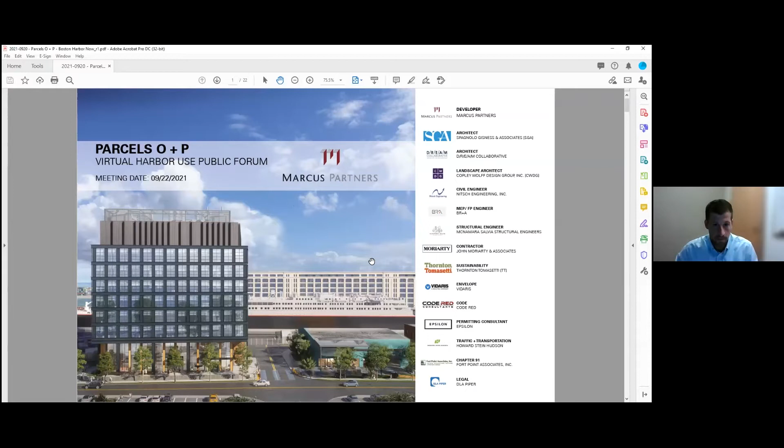Thank you, Bud, and good morning, everyone. Kristen, if you could just pull the presentation up as we get started. My name is Andrew Mack, and I'm with Marcus Partners, as Bud mentioned. For those who are not familiar with our firm, we're a real estate and development firm based here in Boston. We're the developers of Parcels O and P. I'm joined here by several of my colleagues: Patrick Souza, Mike Scannell, Mary Kensinger.

As a firm, we're very active in the Raymond L. Flynn Marine Park, which outside of this development, we are also the developers of 310 Northern Avenue, sometimes referred to as Parcel X. So we had submitted an LOI for that in July of this year. We also recently submitted on 22 Dry Dock, which is just around the corner. We are one of three firms pursuing that project with the city, and that is a development we are very excited about.

Our presentation, I'd encourage you to look at the proposal that was submitted. So for today, though, for Parcels O and P, a quick introduction of our team. The structure of our presentation today is going to be 20 or 30 minutes. It's a smaller group here on this forum, so we would encourage questions, have it become conversational. This is here for you to get information about our project, and we'd be happy to answer any questions.

So our design is led by a joint venture between SGA and Dream Collaborative. Kristen O'Gorman is here from SGA; Kristen will be presenting our design. Kristen's also joined by Troy DePisa from Dream Collaborative. We gave Troy the day off, so Troy won't be speaking, and he's on for the first 30 minutes if there's any questions for Troy.

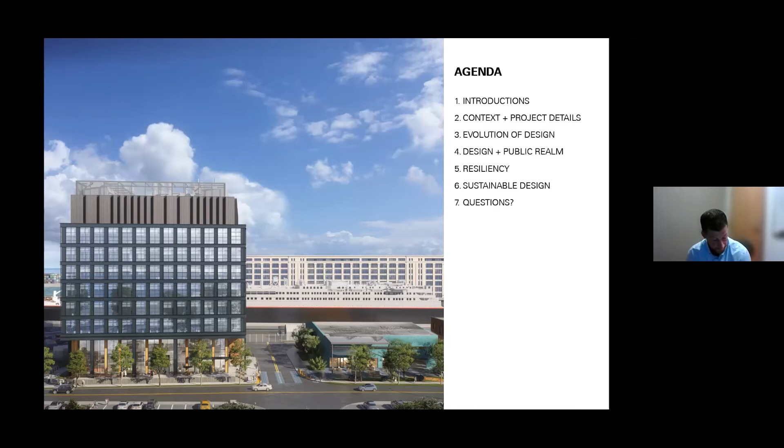A few high-level overview points. The presentation was set up looking at that survey at the beginning, and for some folks this is the first time you've heard about our project, so we'll try to give you an all-encompassing overview. For those who have followed us through our submissions and public meetings, this will also be an update. We've tried to have both audiences in mind.

As Bud noted, in August we received our Article 80 approval. This was the culmination of submissions — we submitted our letter of intent in December of 2020, filed our PNF in April, and from April continuing through today it's been a very busy summer with a lot of public meetings and great feedback. As we opened the meeting discussing some initiatives of Boston Harbor Now related to access and resiliency, those are two areas we think the development responded to well, and in addition sustainability — three areas where we feel we are a leader.

The project at a high level will be a 219,000 square foot research and development, or life science, facility on parcel O to the right. The parcel to the left, parcel P, will be an adaptive reuse of the existing facility as an amenity building — Kristen will talk about that. We think that's a really special building, and we're excited about not just that building, but the public realm created in front of it.

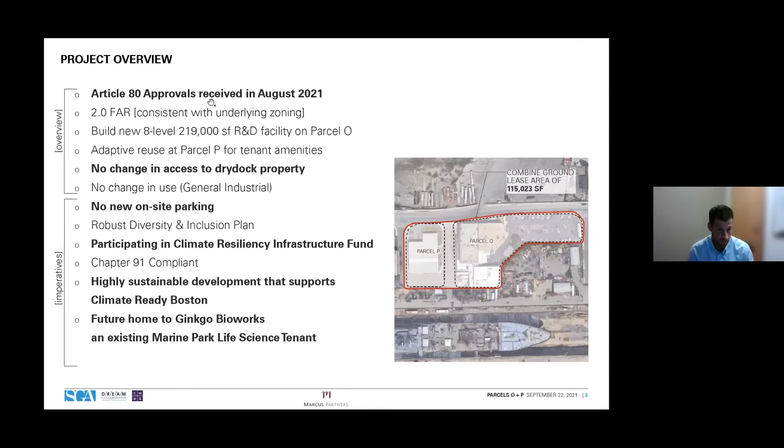And with that, I think we should dig in on our design, and I'll turn it over to Kristen to talk through that. Great, thanks.

Kristen O'Gorman with SGA. Thanks for having us this morning. Just quickly to orient everybody on where we are in the world, we're in the Marine Industrial Park. We have two parcels, O and P. It's this panhandle shaped site here adjacent to the dry dock.

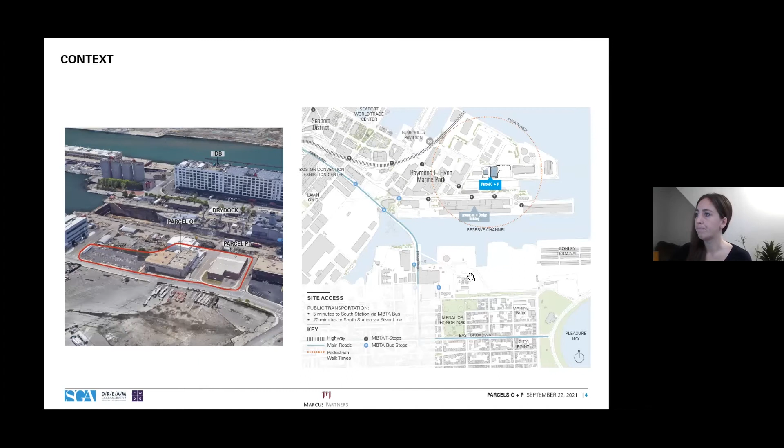For those new to this project, we thought it'd be helpful to run through how we ended up where we are today in terms of our building. As Andrew noted, we have two existing buildings on our site, the Au Bon Pain building, and 3 Anchor Way, which is the McDonald's steel building.

Preserving the working waterfront and access to the dry dock was one of the largest design drivers here, which really located our building for us. We made sure that we maintained that access both on Anchor Way and Au Bon Pain Way.

We're going to be demoing the Au Bon Pain building and virtually constructing in the footprint that it is today. We'll be preserving the Parcel P building as an amenity building to support the larger tenant. We're looking at 8 levels of R&D plus mechanicals, and all of this will be kept under the FAA height limits from Logan airspace.

Moving on to the articulation of the building, we are raising our first floor 4 feet above average grade, in response to sea level rise. We are also raising critical infrastructure an additional foot above that, so this building will stay online during a storm event.

What that's allowed us to do is articulate our entryway, and we've created what we're calling a porch. This is a new typology that will be found in the city where other projects will also have to raise their first floor above the average grade of the road infrastructure, so there are different ways to resolve that. We used this as an opportunity to create a celebrated dock expression and porch for our building, which we'll get into on future slides.

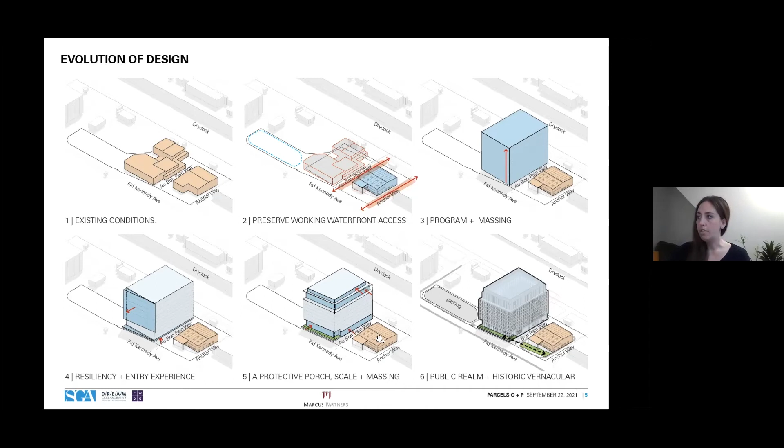The way we were able to reduce carbon emissions and nearly eliminate fossil fuels is by the investment of air source heat pumps. We also worked with the city on some articulation of the penthouse, materiality, as I noted, and the public realm. We are going to be in compliance with Boston's Complete Streets at our sidewalks, so our sidewalk widths have increased, and we have tree and planting strips along the edge of our property as well. We're adding solar panels to Parcel O's south-facing penthouse and to Parcel P.

Parcel P will also be 100% electric VRF and will be in compliance with LEED Gold standards as well. Even though that's not new construction, we're doing as much as we can to tell a similar sustainability story there. Christine will go into the design of the plaza more - we're really excited about that too.

Another note is that we've just implemented a lot of art here. I'm working with the city, and they seem quite excited about that. We're hoping to wrap the Parcel P building in some form of art, use it as a canvas, and link that to some of our back of house loading dock doors, and also looking to use pavement art to connect the parcels together.

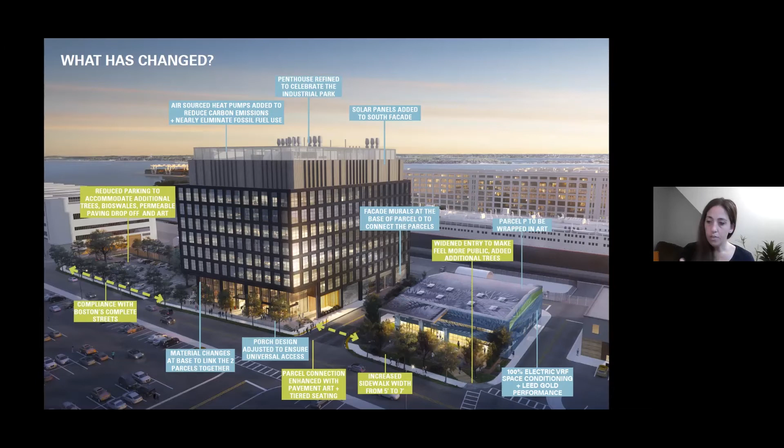We've thought of this project as 3 components: we have Parcel P, we have Parcel O, and then we have the parking area. We're able to carry art and some of our streetscapes through the project to make it feel cohesive.

Just to orient you all again in plan, Parcel P is this amenity building where the indoor bike parking will be located. The plaza is out front. We have showers and lockers in the main Parcel O building. We also wanted to highlight that on top of the indoor bike parking, we have convenience racks located throughout the site.

We've also worked in a ride share and drop off, to pull cars off of Fid Kennedy into our site. And we do have 25% of our lot designated for electric vehicles.

I just wanted to note too, I think Andrew touched on it, but this relationship between pedestrians and trucks was kind of a design driver as well through this process. It's that separation - protecting the trucks from the people and the people from the trucks. There are different ways that we've looked at doing that.

The design of our plaza pulls people in, and the elevated porch actually pulls people up and away from the street. Little things like the rideshare drop-off pull cars off of Fid Kennedy, which is a trucking route that we need to preserve. Our loading, electrical, and some of our other back of house are located more adjacent to the loading dock here, and we will load off of Au Bon Pain Way.

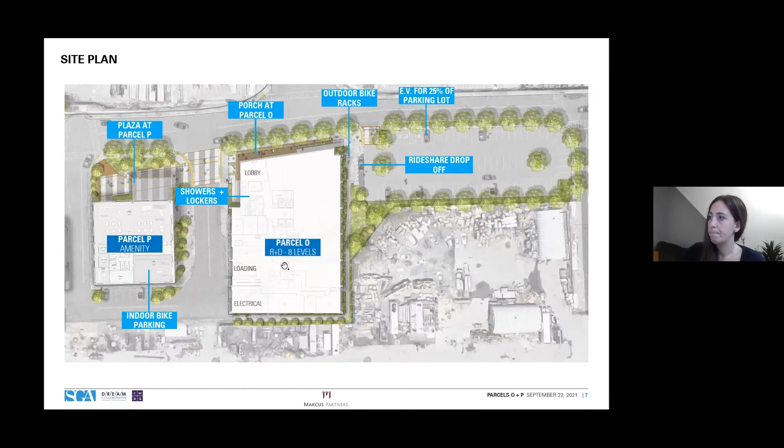Jumping into a little bit of inspiration for the architecture, we really looked to the neighborhood. We were very much inspired by the rigor found at the IDB, this historic typology, and then also some of the steel shapes and materiality found throughout the park or the area, such as in Conley Terminal.

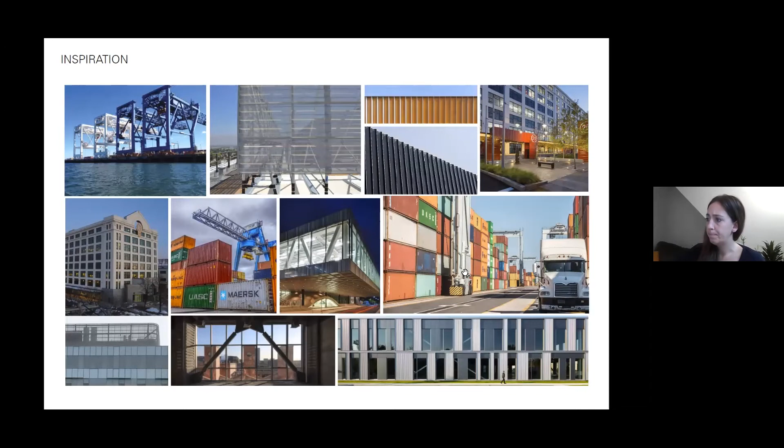Sustainability doesn't just mean the resiliency measures and some of the mechanics we're putting in the building, but the actual design was thoughtful with that as well. We wanted to maximize our daylighting and views, but also minimize our vision glass. So we've strategically located our glass to respond to being most appreciated on the interior of the building.

So we've looked at the program that will be in here, which is a life science company, and then we've worked back from there. And then as noted, looking towards the inspiration of the IDB, we've kind of layered on this rigor and rhythm, but utilizing steel shapes that were maybe more found in Conley Terminal.

Our total building average of vision glass is actually 33%, which we're quite proud of. We've also looked at orientation as well, so our south side is more opaque and our north side is more vision glass to respond to that.

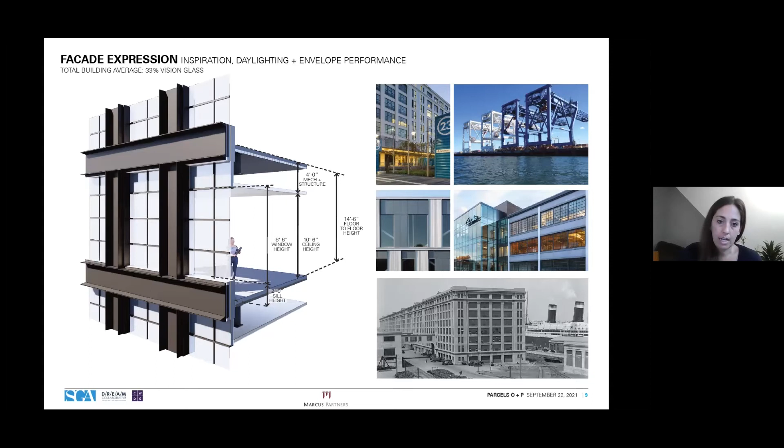Dropping you down to the ground here, you're looking towards our entry base and this dock expression that we've described, once again inspired by the IDB and that loading dock expression there. Using this elevation change as an opportunity for step planters and bleachers and to really celebrate this entry.

We're also looking to use warmer materials down at the base. We're looking to be inspired by blackened steel above, but maybe more of a wood look at the base to warm it up, have it be a more tactile material where people will be next to it experiencing it.

You're also starting to see a hint of a suggestion of that pavement art that will cross over Au Bon Pain Way and connect back towards the plaza at Parcel P. Looking down Au Bon Pain Way, you're catching the side of our loading docks, which we're suggesting some sort of mural to mimic what we would be implementing at the Parcel P building.

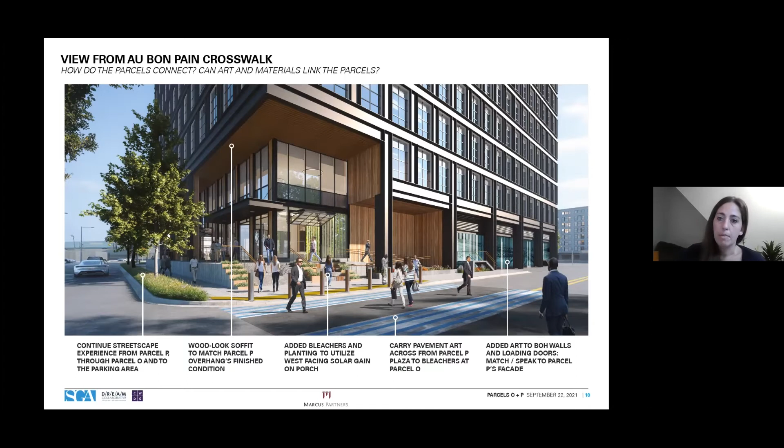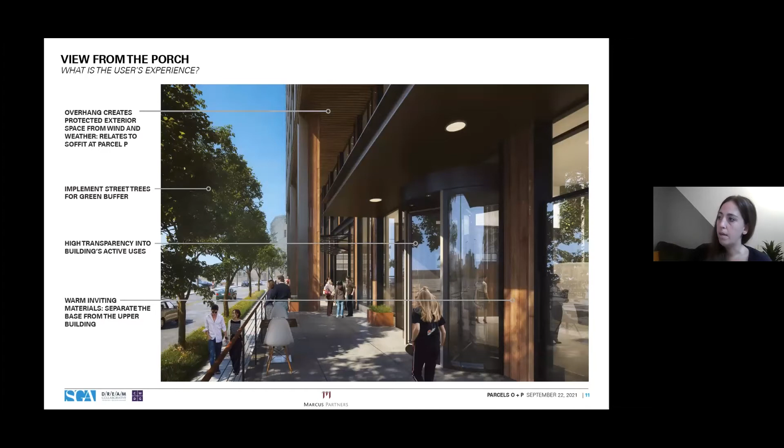Just bringing you up on that porch so you can start to experience that, once again lifting people up and away from that trucking route. And then looking back towards the Parcel P building.

And the art that you're seeing here is a placeholder. We're going to be working with the city to nail that down, but the story that we've been working with them is that this art wants to represent the neighborhood, the marine park, but also the tenant, which is a biology company. So that's why you're seeing a hint of coral and starfish, because that's the play between biology and marine, which we think has a nice synergy.

Even though these buildings are different, we're looking to link them with some materiality. There's an existing addition on the front of Parcel P that we are removing but keeping the structure of. We'll be looking to add that kind of warm wood look on the soffit there to mimic the soffit overhang that's found at Parcel O, and once again implementing some blackened steel there too.

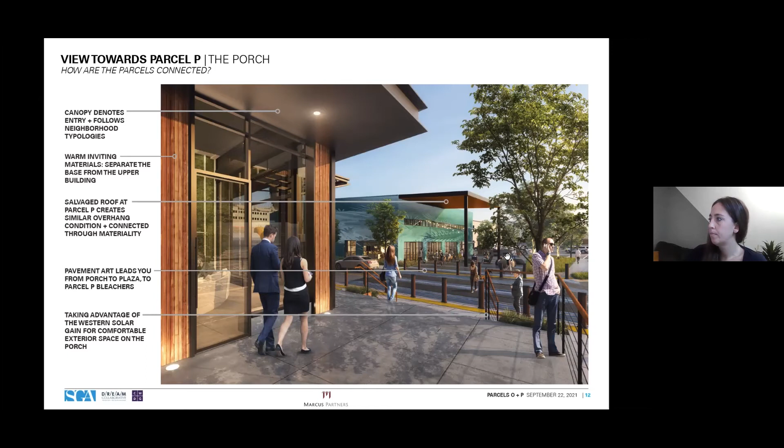So Christine Wilson, the landscape architect with Copley Wolff Design Group. Good morning, everyone. I want to first kind of dig into the pedestrian experience.

Kristen already mentioned this, but we are implementing the principles of complete streets along the entire frontage of this project. So to bring your attention to the sections on the right, the top one is cut through the streetscape at Parcel P, and the bottom one is cut through the Parcel O with the front porch. So we are widening the sidewalk and pulling it away from the roadway curb to introduce a tree line planting strip to help buffer pedestrians from the trucks and the trucks from the pedestrians.

Also, as far as the pedestrian experience, if you're coming via bus or from the Innovation Design Building or elsewhere in the Seaport, you will be walking towards this project along Fid Kennedy, coming from the west. So looking at this diagram, that's the bottom right. You first approach parcel P, and there we have the parcel P Plaza.

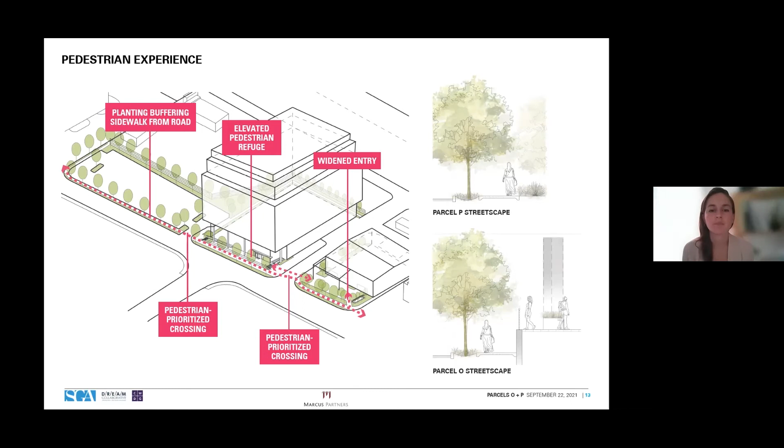So you can push and pull this furniture around, push it away for social distancing, for example, or move it all into one area if you have an event.

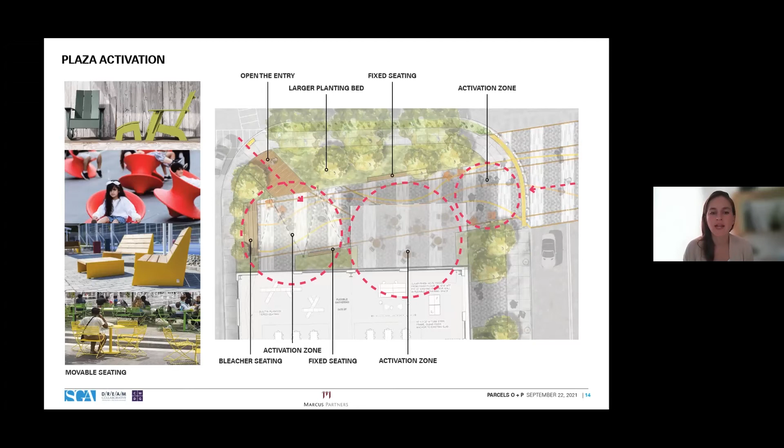If we move on to the next slide, we see this space more at eye level, with the planting on the left that maintains sight lines, but also makes the space feel buffered from the working waterfront traffic. Kristen already touched on the material connections between these two buildings, the wood soffit, the facade murals.

The design of the facade murals will be coordinated with the pavement mural that is in this plaza space, and again continues across, up on Penn Way streetscape, to that porch.

So here we're standing right in front of the bleachers on the parcel P side, looking over at the bleachers on parcel O.

I'll add a comment on this, because we had something in the chat from Tom Reddy, Fort Point Neighborhood Association, on whether the amenity building was private or public. Tom, just want to address: the amenity building use has not changed, that remains a private amenity, and it is leased by Ginkgo Bioworks.

What we have, and Christine and the team have worked really hard on, is making sure the public knows that this is a public plaza. So how we program it is going to be really important to encourage activation there. But I just wanted to acknowledge your question and respond. Sorry, Christine.

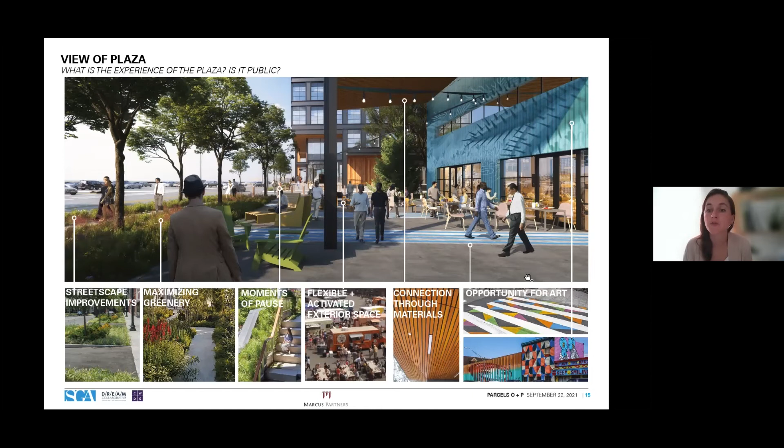So if we continue on to the next slide, I'm going to hand it off to Chris, and then I'll take back the mic to talk a little more about the planting design.

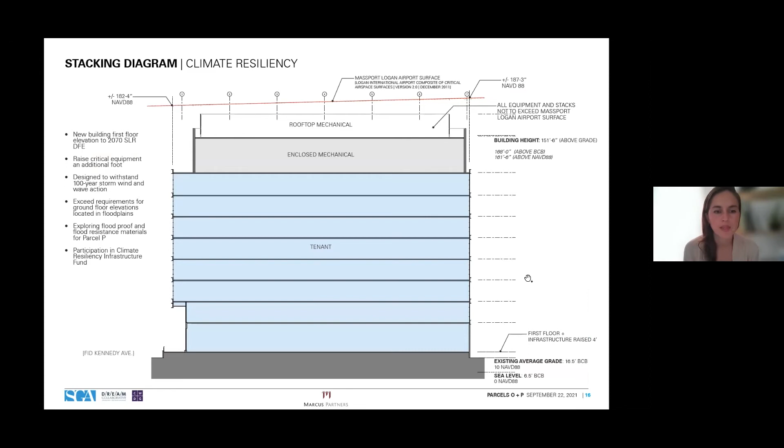Thanks, Christine. Chris Adi, Nitsch Engineering. And so getting into the resiliency discussion here a little bit for climate change.

We've touched on some of this already. This is giving a vertical orientation to the building and how we're reacting to sea level rise and climate change. If you look at the bottom right, you can see current sea level at 6.5 Boston City Base, and the average site grade is about 16.5.

So we're about 10 feet above that today, which coincidentally is also the 100-year floodplain today. To meet these resiliency requirements, we're raising the first floor and infrastructure 4 feet above that, which if you look at the left side, you can see how the front porch is elevated above Fid Kennedy Avenue. This is in compliance with the current 2070 sea level rise design flood elevation.

And then the Climate Resiliency Fund, realizing that we're doing what we can to protect our site, but that this is really a district-wide, neighborhood-wide issue, participating in this fund helps look at that on a larger scale.

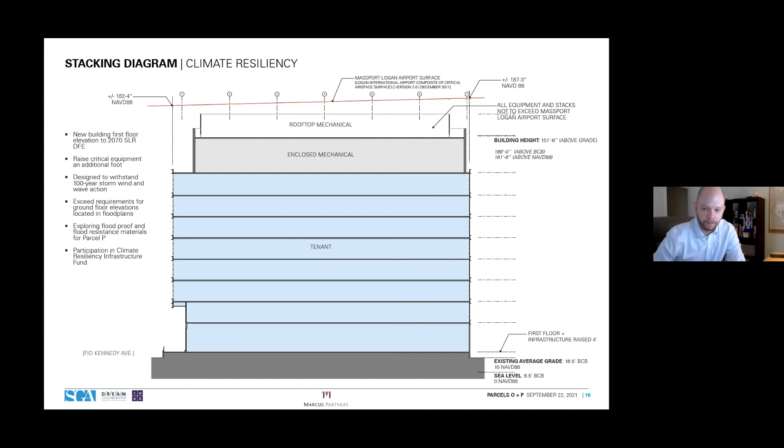And I think kind of unique for an urban site like this, we're going to have some bioretention areas, which will direct stormwater to and give some surface treatment. It's something you don't see as much in the city because there just isn't space for it, but we have some space here. So we're working with Copley Wolff on that design.

We're going to capture and infiltrate the first 1.25 inches of stormwater runoff over the site impervious areas. This is in compliance with city standards. The benefit here is that this site overflows through existing storm drainage infrastructure pretty much directly to Boston Harbor, just across the street. So capturing that first 1.25 inches will allow us to treat that water before it goes out to the harbor and improve the stormwater quality leaving the site.

Additionally, we'll have additional plantings throughout the site, in the parking lot, and around the parking lot and buildings, which will help with heat island effect.

We're also looking at a reduction in peak runoff rates and volume during not just the 1% storm, but all the storms we're looking at—the 2, 10, 25, and 100-year storms. A reduction in the rate and volume of runoff leaving the site in those situations will allow the city storm system to better handle runoff from larger storms in the future. And with that, I'll turn it back over to Christine.

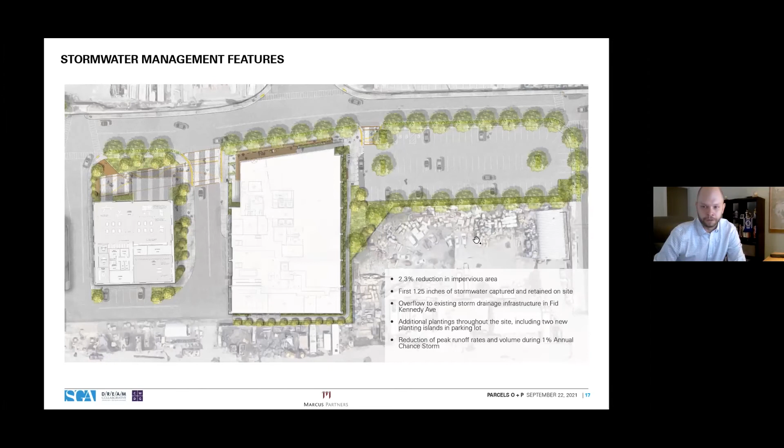To the south, we're draining the parking lot into these bioretention areas to utilize the soil and plant material to help filtrate the particles out of the stormwater.

As far as the planting, we're not only using plants that are native to Massachusetts, but specifically to Suffolk County. We're also looking at salt-tolerant species, not only because this area will flood, but also due to road salt from de-icing these roads and the working waterfront during winter, and of course the salt spray in the air given the proximity to the ocean.

We're also really analyzing where we need to locate really hardy plants, like along the roadways and areas where there will be people, versus the more protected bioretention areas where those species are specific for bioretention. So we're coordinating the planting design with the grading and drainage that Chris mentioned.

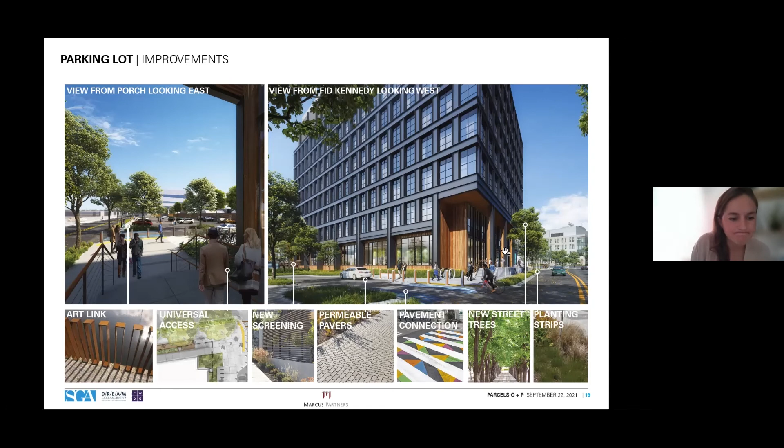Thanks, Christine. Christine, Chris, and Kristen have done a great job going through and summarizing a lot of this stuff, but I'm just going to provide an overview and talk about some of the things that we, as sustainability consultants, think really stand out about this project and are, quite frankly, a tremendous public benefit.

Starting with this image, we'll go from outside to inside. Christine mentioned all the landscaping measures put in here. One of the most important things we wanted was for people to be able to arrive at the site in a sustainable manner, so there's ample bike parking and plenty of throughways for bicycles to safely travel amongst cars in the working waterfront.

Once folks get to the site, like Christine mentioned, there's incredible landscaping, native and salt-tolerant species. As Chris mentioned, we're accommodating sea level rise, so water is dealt with on site with beautiful landscaping treatments.

Continuing into the building itself, Kristen and team have done a really strategic job with the shell of the building. You can see the window-to-wall ratio is pretty modest on this project. It's nice, it matches the architecture around it, but from a sustainability perspective, it reduces heat losses associated with the envelope. We consider that one of our first measures towards reducing the carbon footprint of any project—trying to reduce the loads the building sees in the first place.

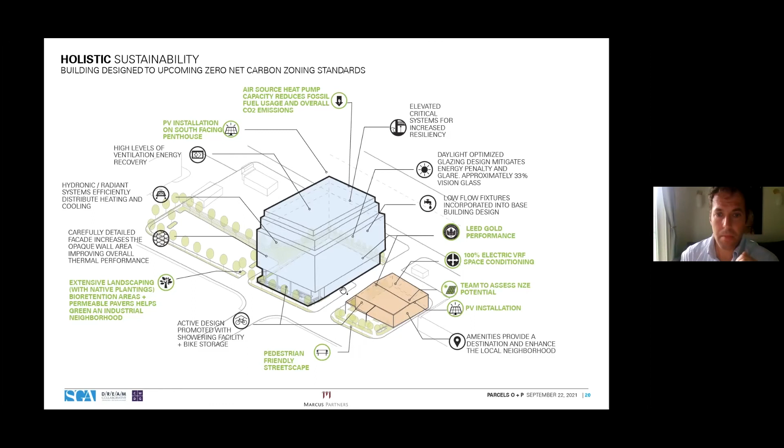So, about those heat pumps: lab buildings use a tremendous amount of heat by nature, and the reason is you need high levels of air change—constantly moving air out of the building and bringing fresh air in. Especially in a climate like Boston, with all our heating degree days, that can be a really heavy load on heating systems. So the first thing we do is incorporate heat recovery—as you're changing out that air, we try to recover as much energy as possible. But then we still need to supply heating to make up for the heat that's lost.

We can do that in a couple of ways. You can burn stuff as we've traditionally done, burning fossil fuels, or you can use heat pumps, which is basically an air conditioner running in reverse. A heat pump uses electricity to heat up the building. And what's a neat aspect about lab buildings is that if you provide 20-25% of the building's heating capacity with heat pumps, it'll cover almost the entire year.

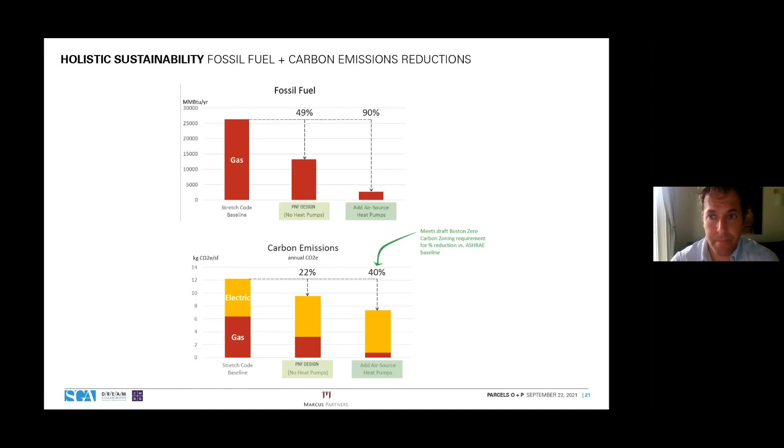I know that was a lot, so hopefully there are some questions. I'm trying to look in the chat here. I see one from Sarah that I can answer.

Sarah asked, to provide shade and reduce heat island, when will the trees be large enough to provide these benefits? Through the Article 80 process, we've actually added trees along the entire southern stretch of the parking area to provide shade and reduce heat island. These trees, as well as the ones on the islands, will provide some instant shade on the parking area, but of course will grow over time to provide more and more shade. So we are selecting trees that will grow ultimately large, as well as trees that are more fast growing, to get there sooner rather than later.

And just around the whole entire site, we're being really mindful of creating a diversity amongst the tree canopy, and choosing the right species for the right spot.

Maybe I can jump in with a quick question. Thank you everybody for this great presentation. You really are ahead of the curve with this building, particularly on the sustainability issues. I think both with what you're doing energy-wise and also with resiliency, it's great to see, because I've heard many people in town say lab buildings are going to be really hard to make efficient, and it's going to be great to have you as a poster child going forward.

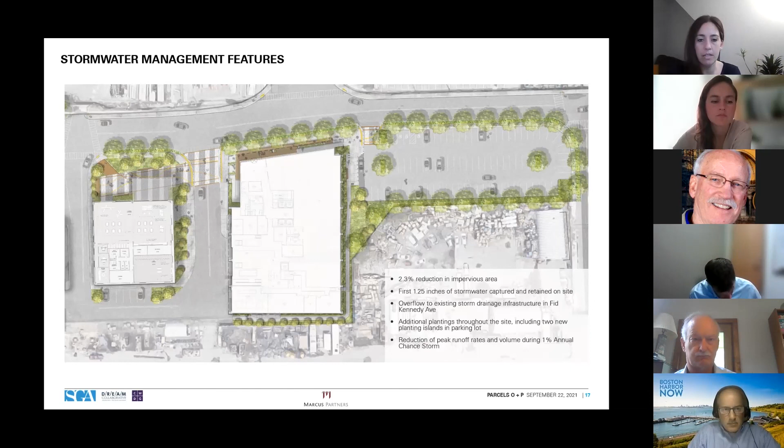So we've been really strategic working with the city on that as well, to make sure that trucks see the people, but also people know that this is a trucking area. So that was a large focus, and will be a continued focus and conversation with them once we get into that more.

And then the art is really found along this perimeter here in between the parking and the sidewalk. And then we have trees in between the sidewalk and the street, which actually carries all the way down here. And then it's just these moments here that have a bit of artwork, but we've tried to be pretty strategic in terms of safety as well.

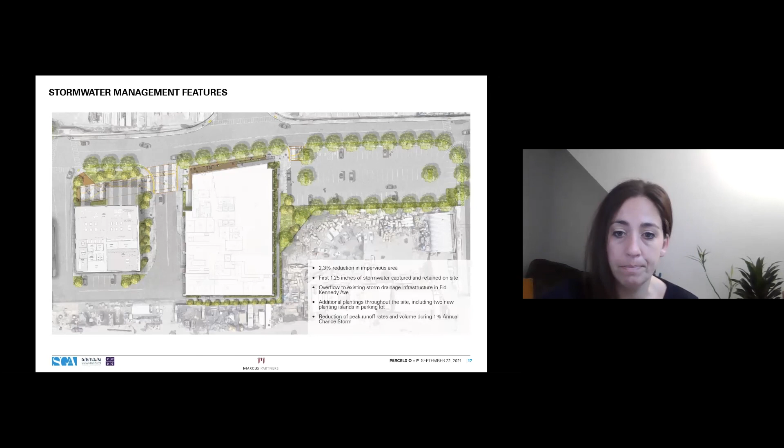Well, let me just add a little bit to that, Chris. I think you did a great job explaining it. But with respect to the access to the dry dock, yes, as you pointed out, it's not an active access road right now.

The gate's been locked, I think, for a long time. There are, in fact, 3 separate access roads from Fid Kennedy: one at Anchor Way, one through our site, and then one at Capstan Way, just off the screen to the right. So that would be up to the ship repair operations to decide which one they use and how often and how many trucks. But presently, they're basically inactive access roads.

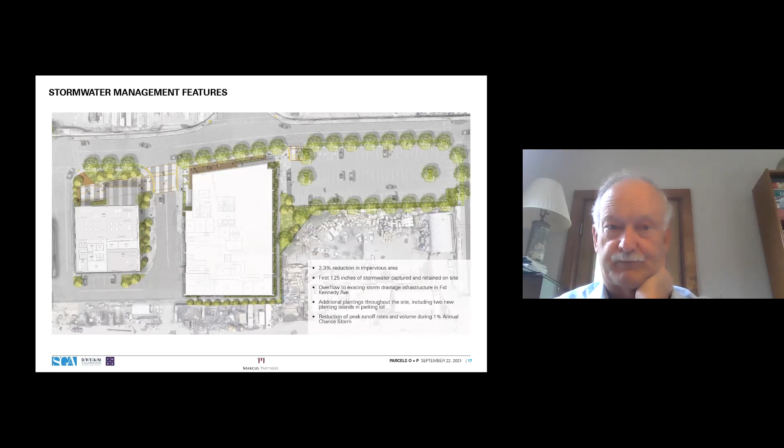Thanks, team. Are there any other questions from folks who are here today?

Sarah writes in the chat that it's a challenge to make a private space welcoming to the public, even with inclusive open space. She echoed the comment I made about restrooms being an easy solution for the public to feel welcome. Thanks, Sarah.

Alice, I can respond to that quickly. Sarah, we completely agree that it'll be a challenge, and I think that is really on our building operations staff and working with Kingo for programming. And the public restroom, I think that's a comment we've heard. We have not, quite frankly, addressed that, but it's something we'll continue to hear. There are just challenges on our allocation of that space and the commitments that have been made already for it. But we understand the comment.

Kathy asks Andrew if there's a program plan or budget for the plaza, or I'm guessing it's for public space. Kathy, you're welcome to join in or speak up.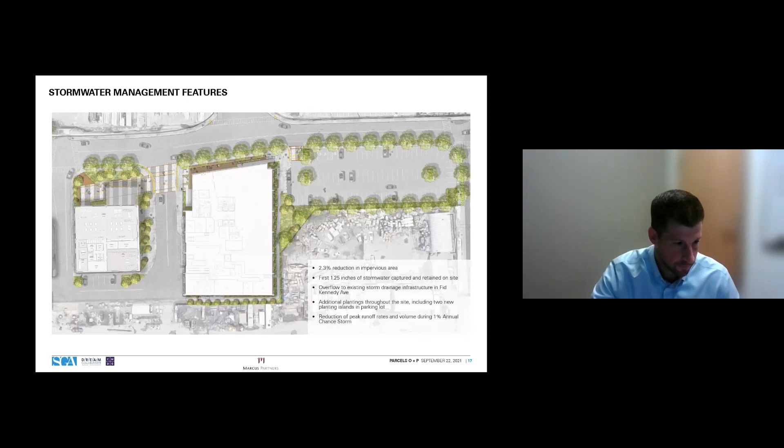Thanks. Kathy, do you have any other questions? No, it's really just that we find that without programming, the activation doesn't really happen.

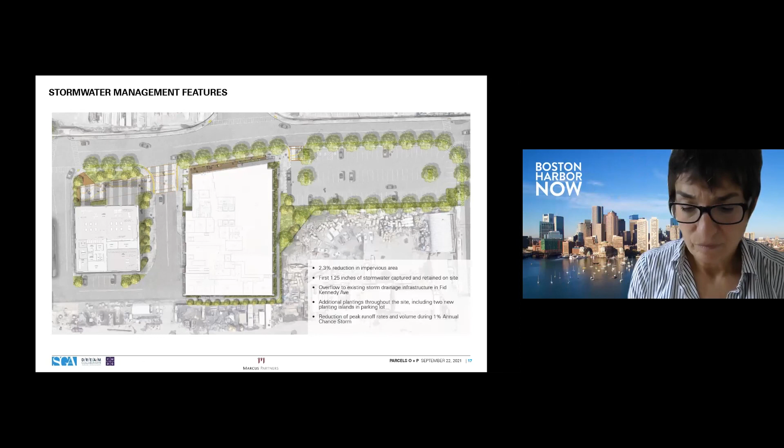Alice, it feels like we may be ready to wrap up this morning. That'll work. I'm gonna go for it.

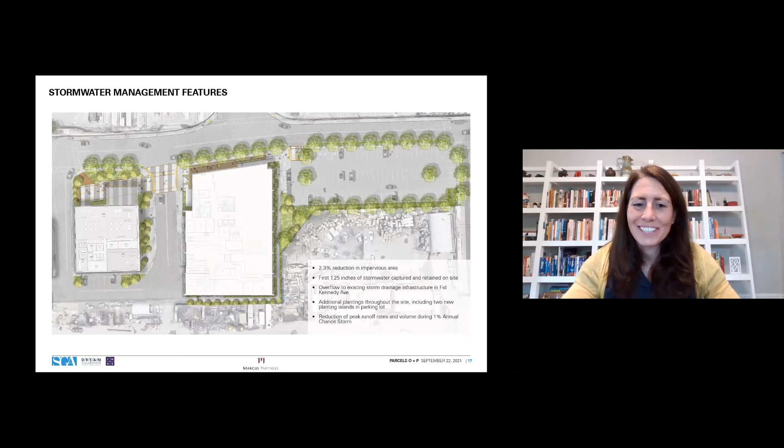Well, I was just going to thank the project team and everybody else for participating this morning. We had a small group, but I think it was a really good conversation. I think we're going to leave the project developers with a few additional things to think about, but I want to commend them again for doing a great job in many respects with this building. And I think it will become exemplary as we go forward.

Kathy's made a good point at the end there. It's not just enough to provide a great space; you've got to figure out how to help people use it quite actively. And we're increasingly interested in seeing these spaces not become exclusive in their use around the waterfront. So I think it's really important to do that.